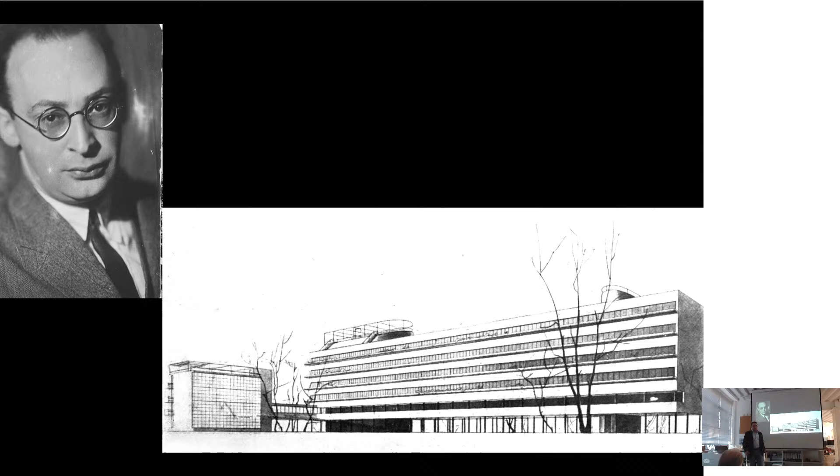Many people, even respecting the aesthetics of avant-garde architecture, still regard Narkomfin as a kind of social utopia of that time, which had nothing in common with real life, just a very interesting example of how people could live. But the house was constructed as a residential block for normal families, and now it is working as a residential block where all the apartments have been sold to different people of different ages, with different family sizes, of different social status. So this is a very good example that the house was done for the modern era, modern people, including us.

But while working on my PhD, I made this timeline of our family, because speaking about Narkomfin, I have to tell about it in a family context. It's really a mess that all the members of the family were architects, and they were writing books or constructing houses. And the situation I was brought up in was very hard, because everything I heard since I was born was just about architecture, with a lot of criticism of some architecture and rarely good words. Being architects or close to architects, you can imagine how it could be.

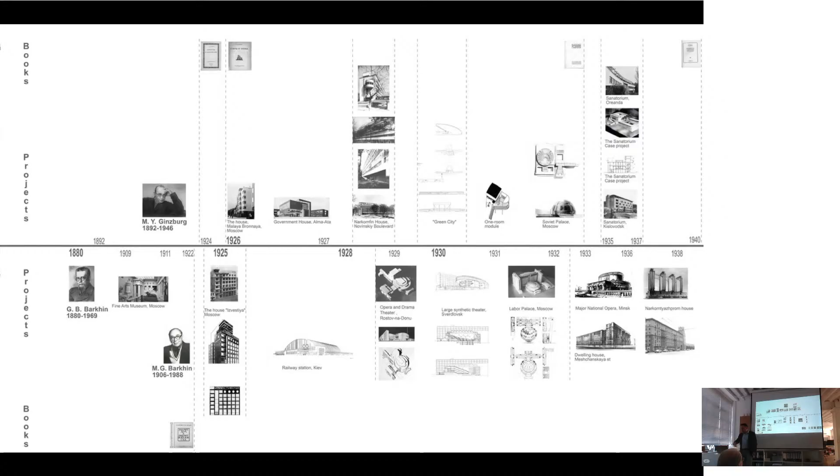So this was important for me, to try to work on this project, because my father started it in the late 80s of the last century.

In 1986 I started to help him in his attempts to bring the house back to its original state, because it was in a very bad shape already, and it has gone to even worse shape through the next 20 years, because all his attempts in the later Soviet period and in the post-Soviet period were in vain. I was trying to help him as a student architect, making some drawings, and later helping to produce concepts of how it could be used.

We were trying every possibility, but it so happened that he tragically passed away in 1997, and it was my debt to him, more than to my grandfather, to fulfill this story, to complete this story, and to finalize the conservation to its final result.

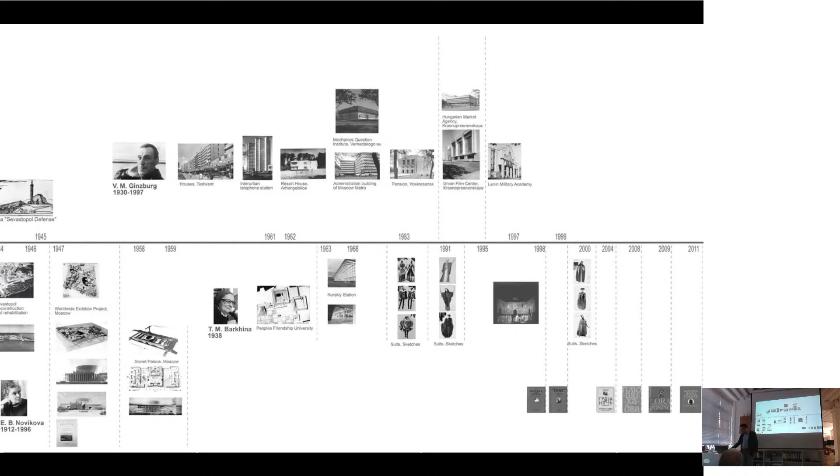But before, I had a very good experience, because my other grandfather, Grigory Barkhin, also was an architect, and he made one of his most well-known buildings, the building of the Izvestia newspaper in Moscow, in Pushkin Square. This is a very nice photo of Rodchenko in his individual manner. So it so happened that the project of conservation of this house was commissioned to us without any idea that the history of the house was somehow connected to our family.

And of course I couldn't say no, and I was trying to formulate the principles of conservation. Being a practicing architect, I had to become a conservation architect, which was not my main occupation at that time. And there was no methodology of work with historical buildings, with listed buildings of avant-garde architecture in Russia. We were trying to learn from experience, how it was done in France, in England. I was asking, for example, John Allan, who was the author of a conservation project, and Winfried Brenne, who was the author of the conservation project in Dessau.

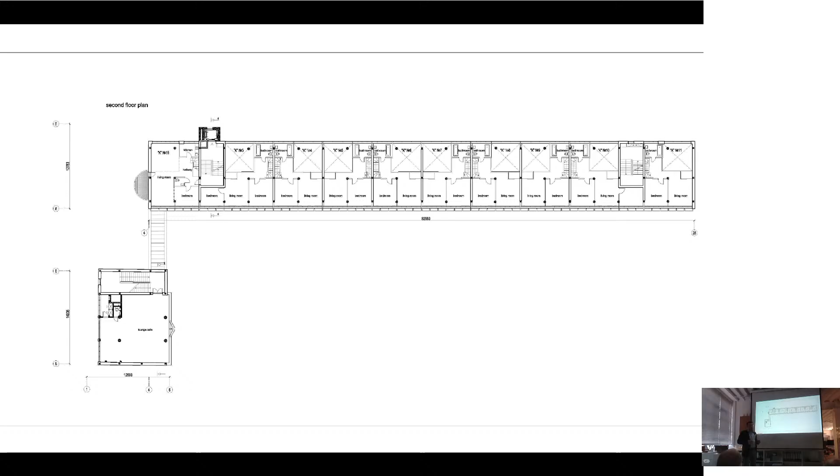So these plans are showing the structure of apartments. There is also a very good explanation why this house was not a house commune, because the commune is something to equalize the people. In this house there are 6 types of apartments for different families, for 2 or 3 members of the family, and some of them already for 4, 6. Apartments from 37 square meters up to 105 square meters. Huge variety, 6 types for different kinds of people living in the house.

The most well-known are these type F units, the smallest ones, but they're not really small, because today a studio of 37 meters is absolutely a good solution for a young man or woman or couple. And this is a studio with the height of the ceiling 230 here and 375 here, because the combination of different heights in these apartments made them seem larger than they were.

And the idea of ventilation, of all sanitary convenience, which is also close to us today, because that was the society existing after the pandemic of Spanish flu, which could be comparable to COVID, and a lot of theories about sanitary rules were invented or formulated after this pandemic. And the architects, especially in this house and some other houses constructed at this time, were trying to use these new rules, same as Ginzburg.

So, I calculated 4 generations of dwellers in this house, and now I'm working on the book, trying to explain not only the architectural but also the social context, and telling about people who were living there, about their histories. And this is a big rhythm of life. The generation of first dwellers, the new Soviet elite, living there from 1930 to 1937. People who came there after the new elite was assassinated in the late 30s, after the war in the late 40s, and living there until some 70s.

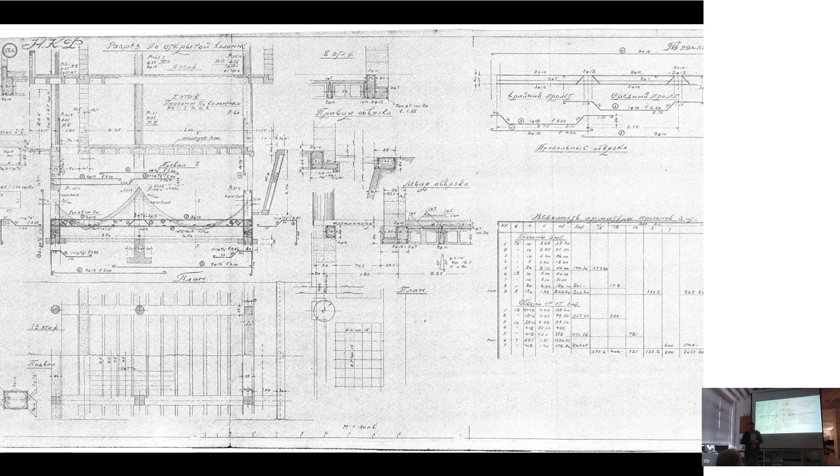The monolith columns and beams inside of the ceilings made a three-dimensional grid, which was the main structure of the house. Same as the stairs, which were done also from monolith concrete in a very good way, because the steps also were prefabricated.

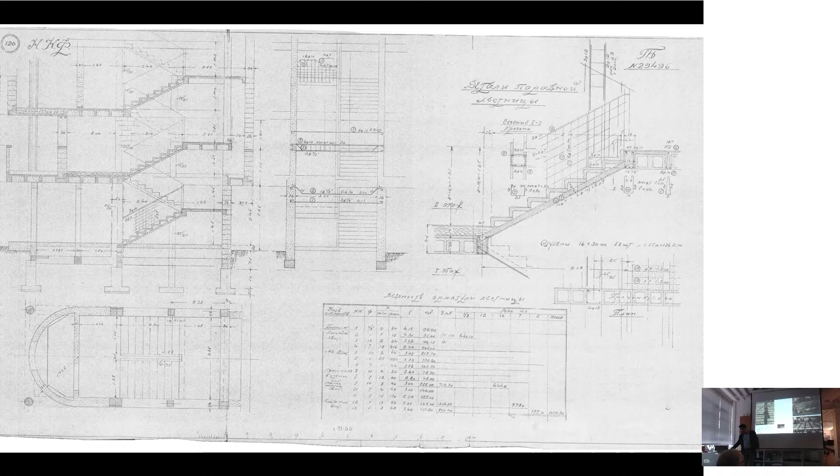in the ceilings. These gaps were filled in with monolith concrete, and the space between the stones with these metal pieces became a concrete beam after the concrete was poured into the ceiling. I will tell you that the cost of such a structure is approximately 20–25% cheaper than a concrete slab.

I was involved once in a project in France of a small mansion, and I understood that the construction workers there, the contractor, used this technology and proposed it themselves just because it was cheaper. So thanks to them, I know this difference. And of course, economy of materials was important because Narkomfin was an absolutely luxury house at that time.

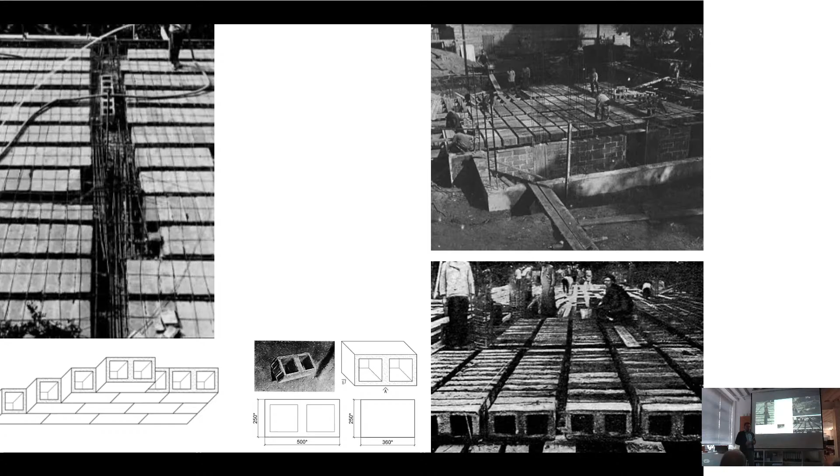I've been in other Ginzburg houses which were done not with the same technology, but using the same apartment types. And they were much cheaper. In Moscow, in Ekaterinburg, they were done much easier, much cheaper. Of course, Narkomfin was really a luxury house of that time, but still the budget was not very high, and they had to look for any economy that they could.

This is another type of stones, which was also prefabricated. Sorry, this one, because this is how they looked in the demolished part. And this is what we found: stones produced by our industry of the same shape, with even the same number of gaps in them, and the same dimensions. It was very important because in some parts of the walls we had to make new cladding, and it was not possible to do with stones of a different size.

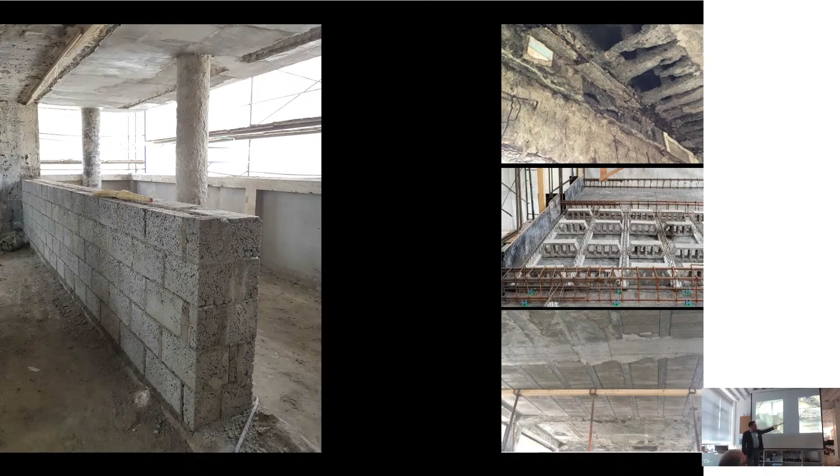That's why this absolutely warm wall of 36 centimeters with insulation here, and block and half block on both sides of the insulation. This is the structure of the walls of Narkomfin. We used these stones to make parts of new cladding, for example, like this. And this is part of the ceiling. This is not Narkomfin, this is the laundry where we experimented.

We also found stones similar to those in the ceilings, because we couldn't do any conservation. The building was absolutely ruined, so we managed to save some parts of the ceiling, but some parts we had to redo. This is a new ceiling, and it looks almost the same as the old parts and how it was constructed originally.

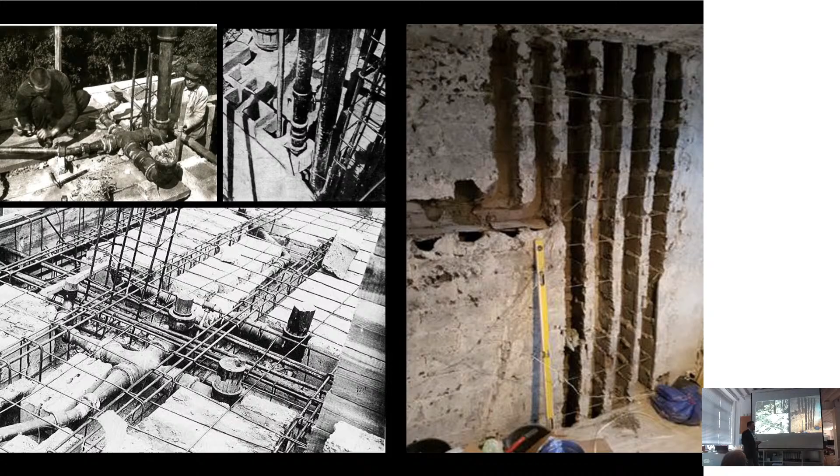A very smart idea of engineering supply, because these pipes also used the gaps in the stones, and all the pipes were hidden inside the walls between the apartments. No pipe except heating, because heating was situated horizontally below the windows. All the sewage and water pipes were hidden in the walls,

and this is the ceiling between the second and third floors of the building, where the size of the apartments changed, because lower we have bigger apartments of 78 meters, and above there are apartments of type F, 37 meters, so two type F above one type K below. They had to make these horizontal parts because the rhythm of these apartments was twice bigger than those above.

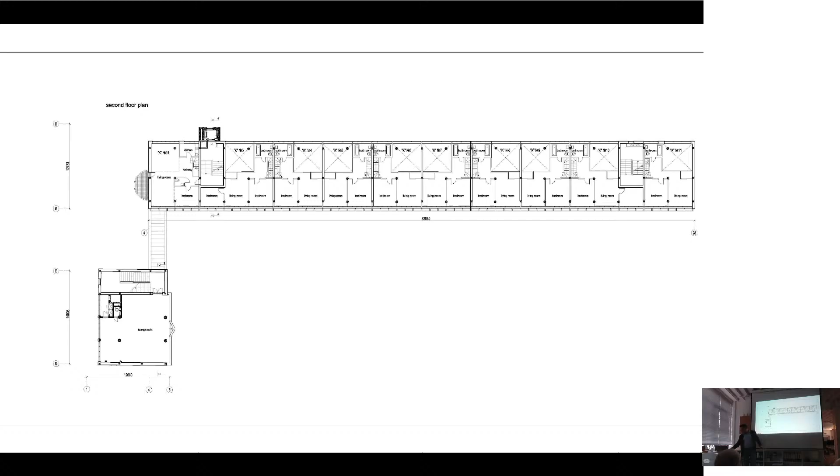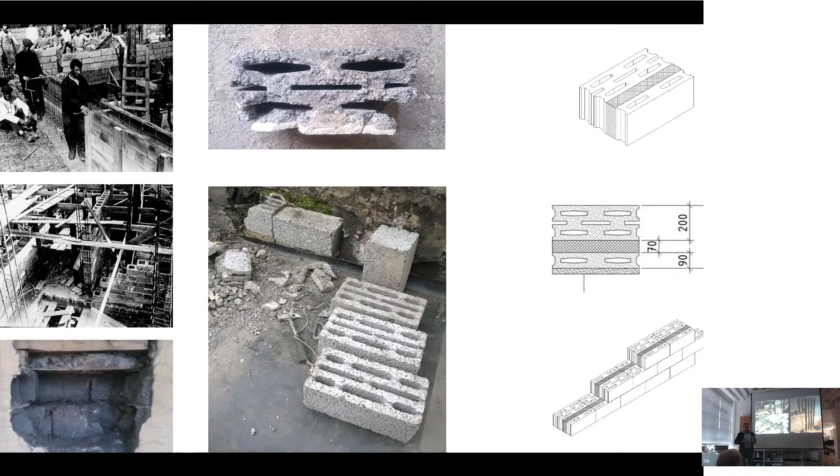That's why they had to make these horizontal parts, and it was a mess to work with them, because no one understood that during the conservation work we were going to leave all the engineering supply in their places. People didn't believe that this is possible, and we were trying to investigate where they were with metal-finding machines, making small gaps in the walls.

Finally, we had to cut the parts of the stones where the pipes were, because otherwise we couldn't put them in any other way. But now all the pipes are in the same parts, even though some of them were damaged. These steel pipes we tried to change very carefully for new ones, leaving the ceiling in the same place

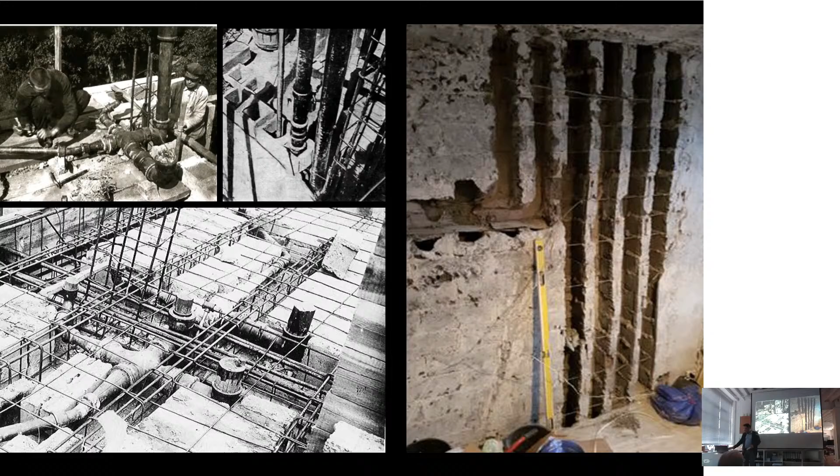without killing the ceiling. Sorry for this joke. So these are just the parts we had to take away, because many things were added to the house, and this is just the diagram of some later pieces that we had to demolish.

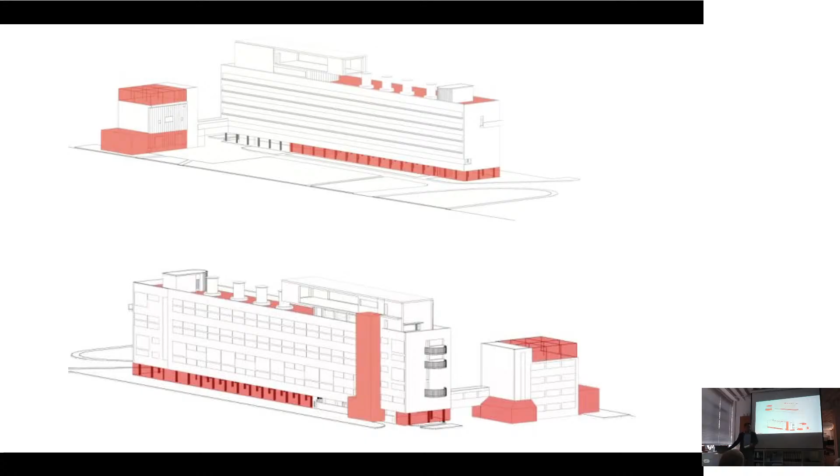This is a very specific story about flower beds, because, as I told already, these flower beds were the problem, because they had gaps for draining here, and in the late 50s people fixed these gaps because they didn't want water from the rain going out of them. And when they fixed them, the water couldn't get out of the flower bed, and then it could get in small holes between the stones, and that of course seriously damaged the concrete structure.

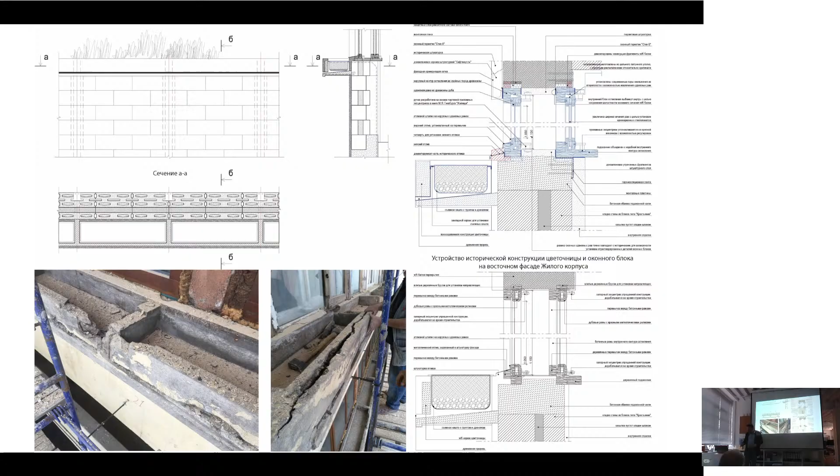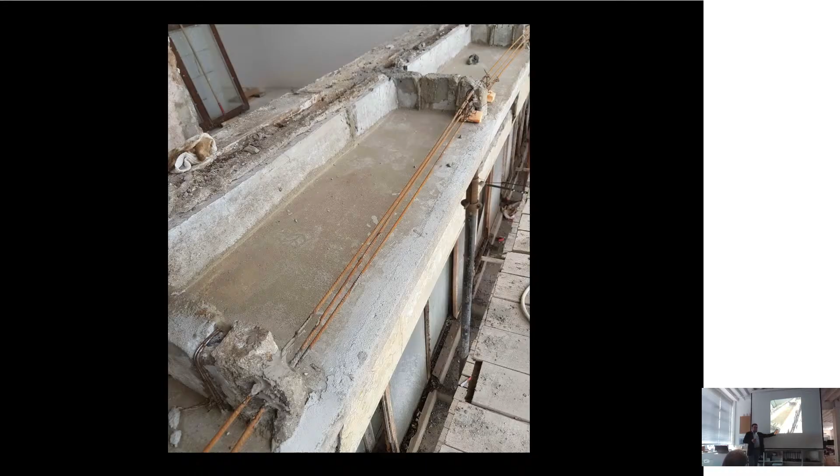It was very complicated to make a contractor not cut all the flower beds and make new ones and fix them on the facade. We had to explain to him and prove that it is not possible, because the metal parts are going from these flower beds to the wall and to the ceiling, and everything was done in the house so that you couldn't touch it, or if you touched this, after some time some other part of the house could move. So we insisted on restoring, not making new flower beds, and this was how it was done.

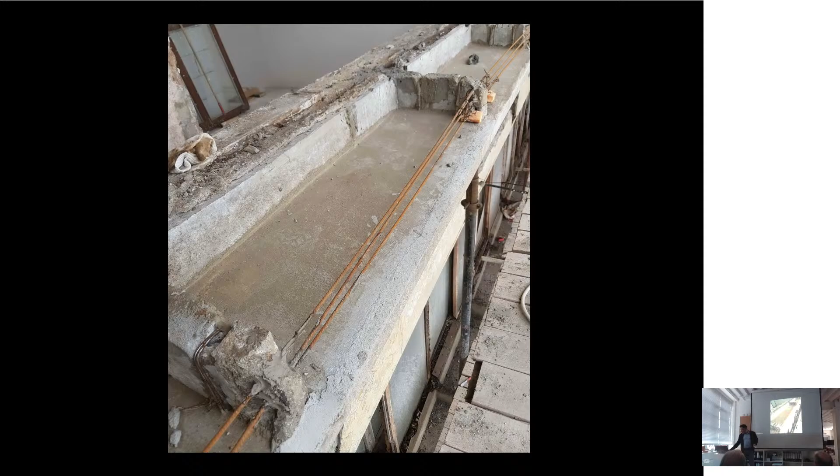These are already restored parts with added concrete, with the original metal frame, which is connecting this structure of the flower bed with this wall and the ceiling there.

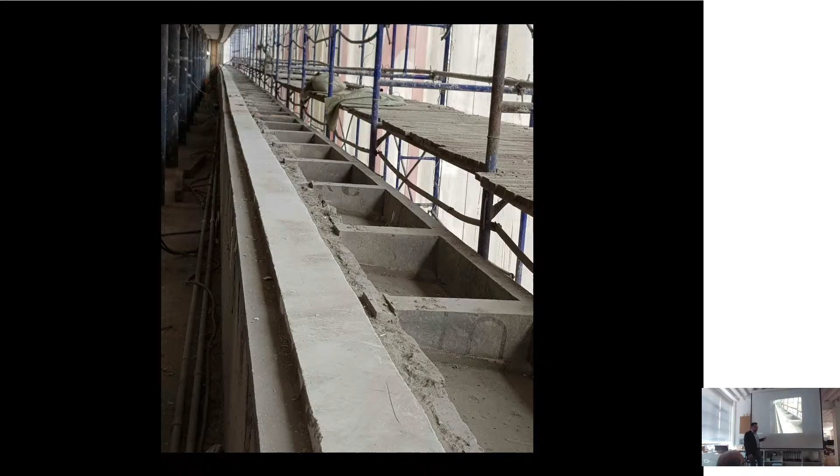This is the structure of the elevator. We couldn't avoid it. Of course, I'd rather take it away, but the developer didn't let me. It was a private project. No state money. No financing from any charity funds. It was a stupid commercial project. A commercial developer which was trying to make a luxury commercial house from this building. And finally they got the prize for the best clubhouse of the year. I guess Moisei Ginzburg could smile somewhere there where he is looking at this, but they got this prize.

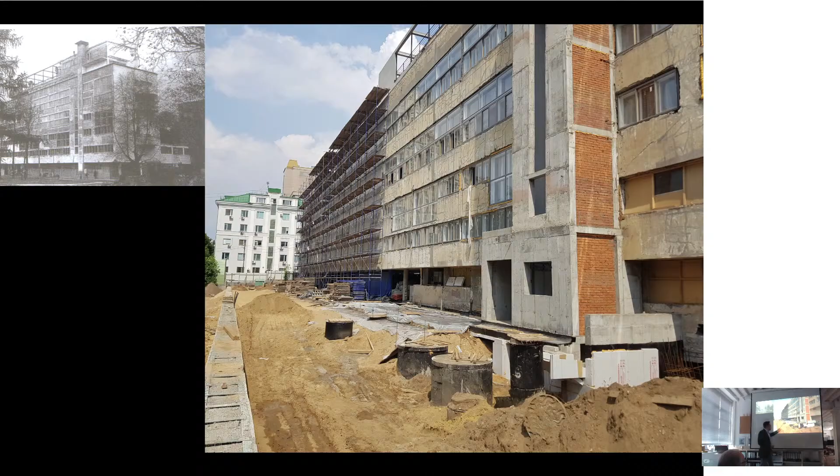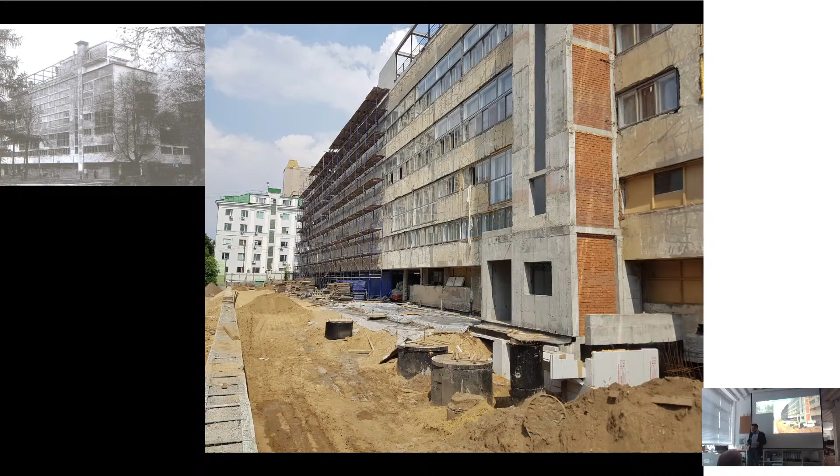So we decided that we are able to leave the lift, the elevator, but we tried to make it as flat as possible. We had to prevent two entries to the cabin from different sides to manage to do this. And we tried to make a projection of the original vitrage of the stairs, which is there, on the elevator vitrage. So we have a cabin with a window and the projection of this original vitrage on this lift, to make it as invisible as we could, not touching the historical original facade.

So this is how it was, not even the worst state of the building, not the worst. These photos are maybe from the late 80s. And how it is looking now.

It is interesting because most of the columns had been hidden in the ground floor, and that helped to save them, because when we found them, we removed the layers of paint with special treatments, and we found the original graphite. They're not black, they're graphite, dark gray, and we made the conservation of this original painting and protected it with a special transparent treatment for conservation projects.

Same thing was with the windows, with the luminaires, with this lighting, which was also built into the ceiling, like they do in modern houses, and all the metal pieces had been hidden inside of later structures, and that's why they survived, and we could use them, and all the metal parts of this lighting are remaining. Of course, we changed the glasses and put in the new electric supply.

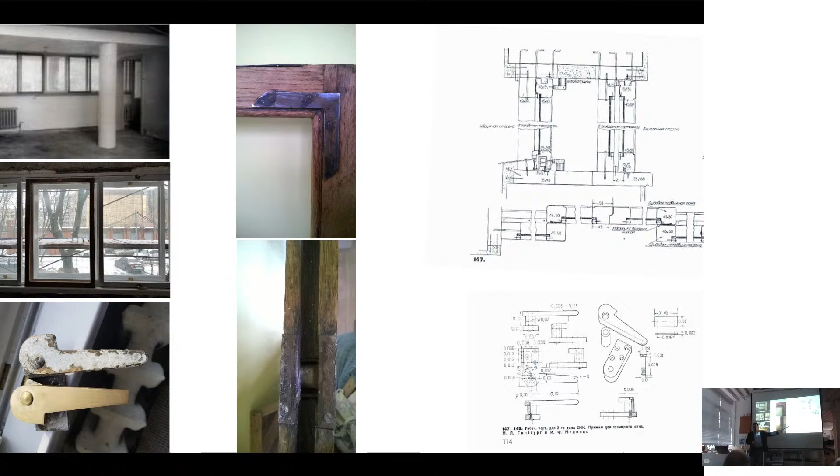So this is the very smart mechanism of fixing the sliding windows. But we understood that when the house was constructed, they simplified something. They didn't have enough, I don't know, money or just a possibility to make this cylinder. And they made a flat metal anchor part instead of it, like here. So we took all the remaining original metal details, and we implemented them into the facade. But the new ones were made according to the project. So they are different, and this is showing what is new, what is real.

Now this one. Here you can see, these are the new ones. Ordered in China. It was an expedition of our structural engineer to China. He ordered the frame for the glazing of a communal building, and these pieces. And that was incredibly funny how they produced it. But these are the new ones.

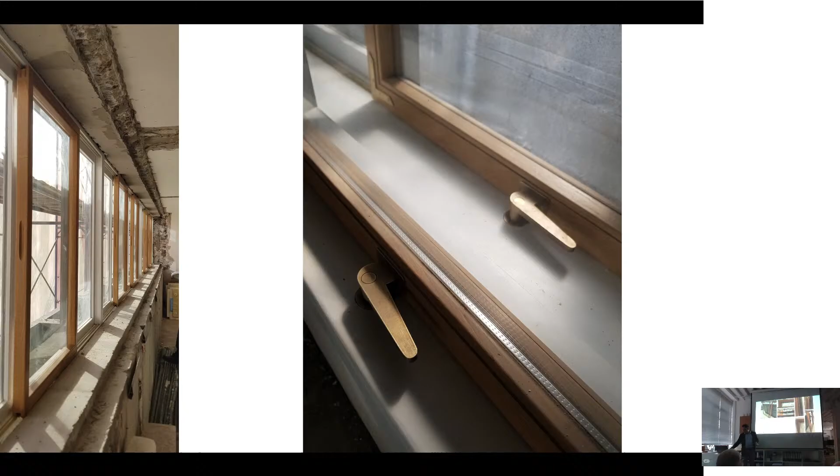This I already explained about the old frames. That was a battle, how to keep the most possible amount of original frames in the house. It was like on the market. I said, we have 80 frames. The contractor told that he's able to restore just some of them. Finally, we used 50 of them, because the developer told that he was ready to throw them all away because this is too difficult and too risky. In the windows of corridors, we put the old frames because people who are coming in the house can see them. In the windows in the apartments, where just dwellers are inside, we made new windows.

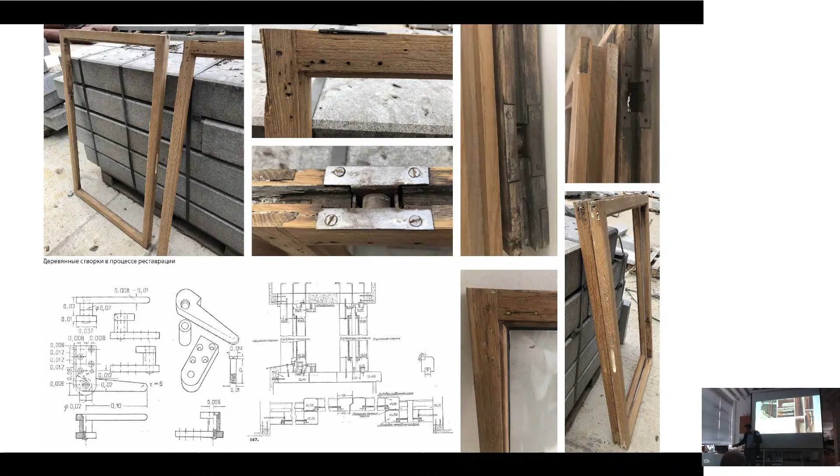And the funny thing is that on the ground and the first floor, they were doing concrete frames for the windows, like Corbu later on. I've seen this thing in Monastery La Tourette that he's done already in the 50s. So they've done these concrete frames, as thin as 40 millimeters, with one or sometimes two metal pieces inside to reinforce them. No one would believe that we can restore them, and we restored some of them.

But this photo is showing the process of production, like we're producing the stones of different types. No, one type we found on the market, and another type we were producing on the site, like the contractor of the house in 1928. And these concrete frames, we were producing them on the site also.

The horizontal windows of the basement, they've been inside in the ground. That's why they've been seriously damaged, and all the metal was corroded. It was not possible to do anything with it. It was also part of that sanitary theory of that time to let sunlight, daylight to the basement. That's why they did around the ground floor. We had all these horizontal windows. Their shape was very bad.

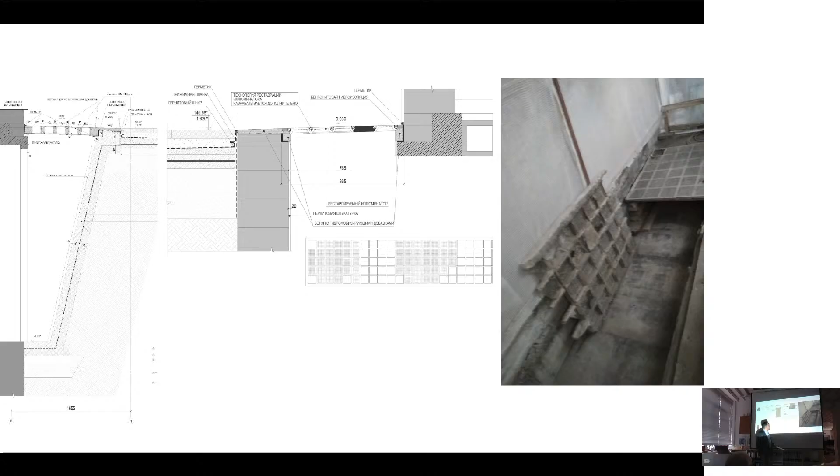We made new ones. This is the process how we were doing them from glass bricks. Very good glass bricks from Czechia, Czech Republic, and this is how they are looking like now.

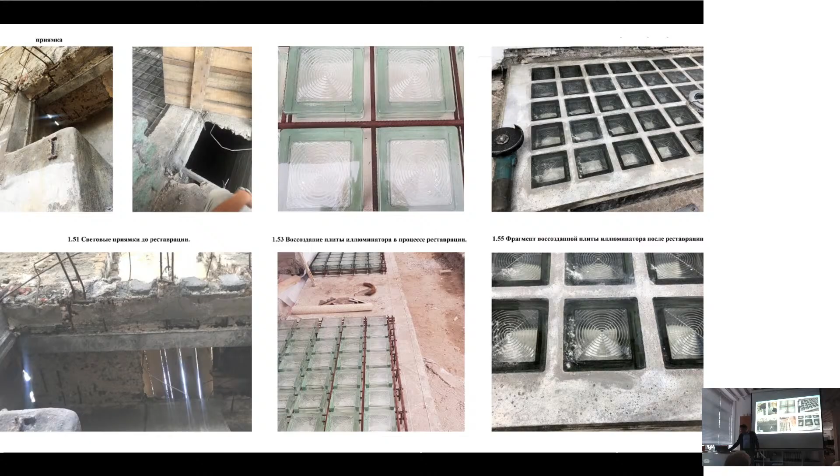The process of the work, and one window which is inside of the house, because the elevator was added later on, and we had one window between the elevator and the house. We made it like a museification. This is a special glass. You can stand on it, and the window itself is below this glass. And this is how they look like from inside.

And the most complicated was to find the same stones, because they've been faced with stones, and we needed to find the stones of the same color, and every market that we were looking at, the color was white. The developer was angry because I stopped the process again, because I told him that I'm insisting to find the proper stones of the same color. And the same color was not white, they were different tones of yellow, brown, and so on. Quite natural. It was very difficult. We found it, and now we have this roof in a better situation.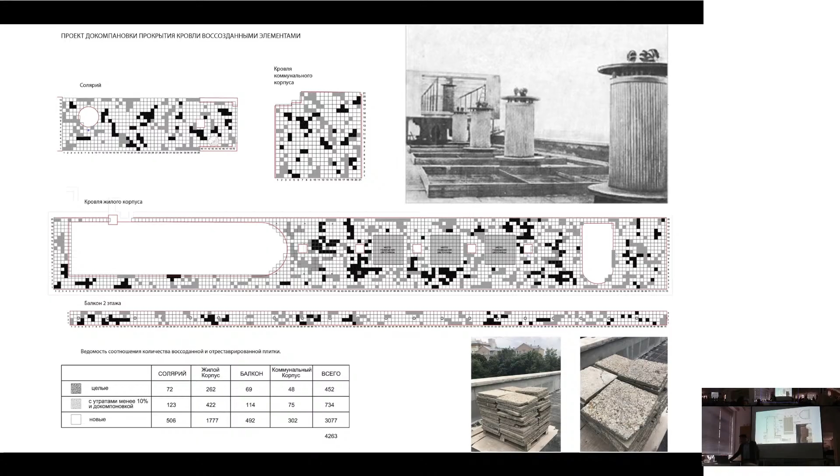This is also a very nice detail. These are the pipes of ventilation. They are looking like chimney pipes over the building, and we managed to conserve all the concrete parts here, but we had to change the wooden parts because, unfortunately, they were not workable anymore. But all the concrete parts are remaining original ones. This is how these wooden parts are looking from below.

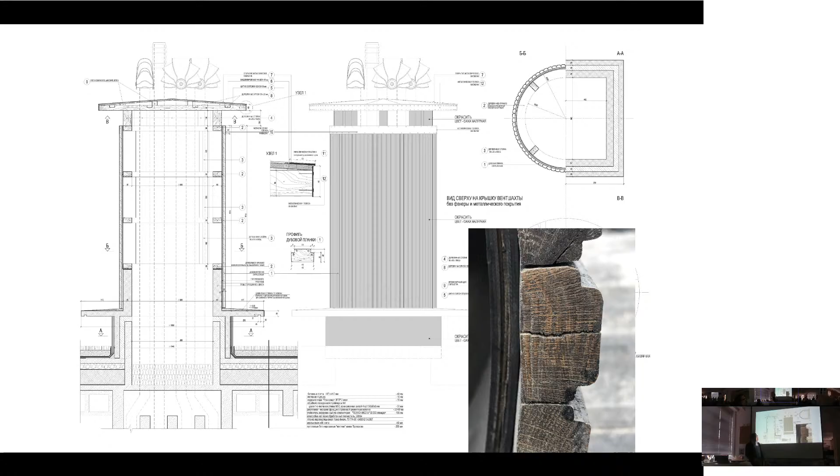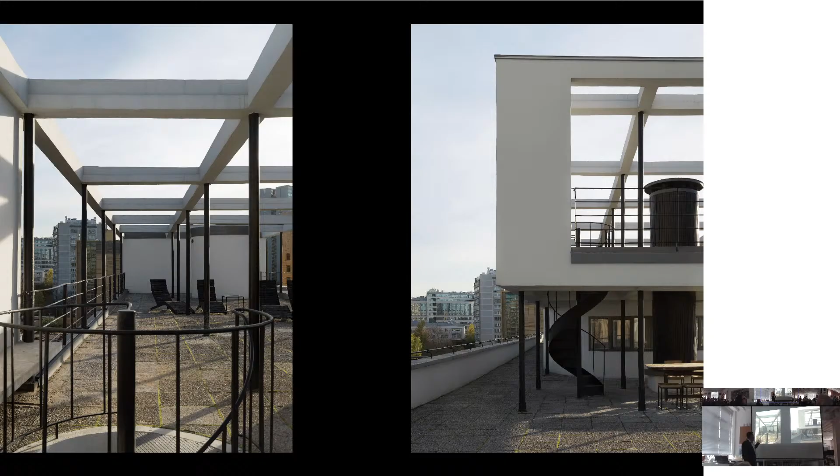So, at the moment, we managed to retain and conserve all metal details, all concrete details, and a lot of these tiles. It was interesting with this railing because it was lost. This is a new part. We found a working drawing of the supporting structure of this railing, and we found the holes in the concrete here where it was fixed. That's why it's like archaeological. Most of the research was absolutely archaeological.

And we understood that we should make this replica, though we didn't find any photo of it. And that was tricky, and I was in doubt. Maybe it was not existing, because there can be a lot of working drawings where nothing has been done according to them. But we found these holes inside of the concrete, and we understood it had been existing, and we made it. Interiors.

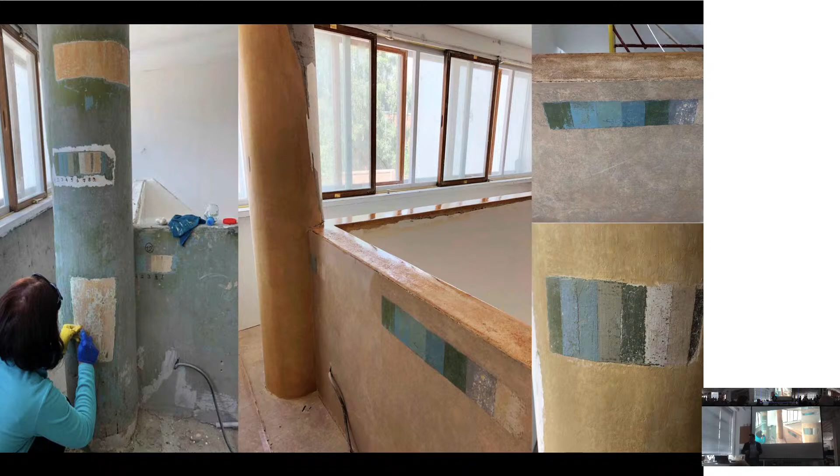These are our studies in one of the apartments. In most of the apartments, everything was taken off, and we had to do them brand new. But maybe one or two of them we found. These are the layers of colors that we found to get to the original one. 6 to 8 times they changed the color in the house. We had these 6 or 8 layers in different parts.

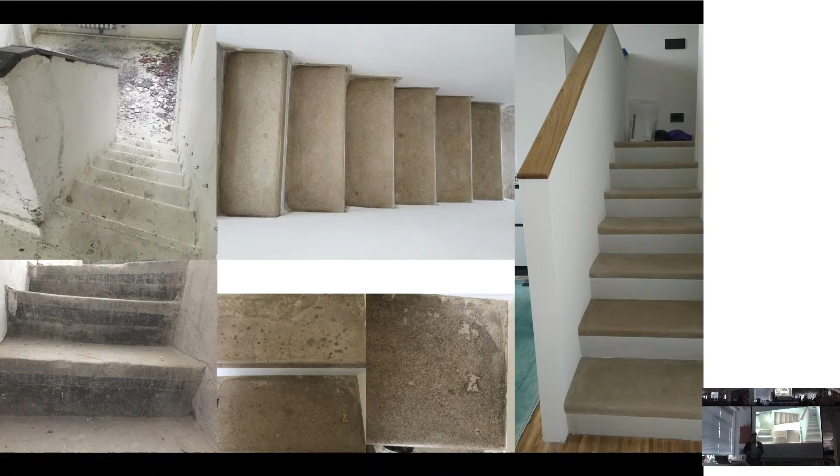The materials. I told in the beginning about the innovative materials that they used there. A good friend of mine, Anke Zalivako, a German researcher from Berlin University, made brilliant research about them, and this will also be part of our book about Narkomfin. This is one of these materials, xylolite.

This is what they do now from cement and sand, but this structure was made of wooden chips and magnesium instead of cement. So it's not as harmful for people. It's warm. It's quite good.

And we insisted that in all the apartments these steps remain. We proved to the developer that we are able to restore them. We found special guys who were working with their hands to restore them, to conserve them. And it's very interesting, they are a little bit different in color, I think, because of the different chips they got. The color of the stairs is different from one apartment to another.

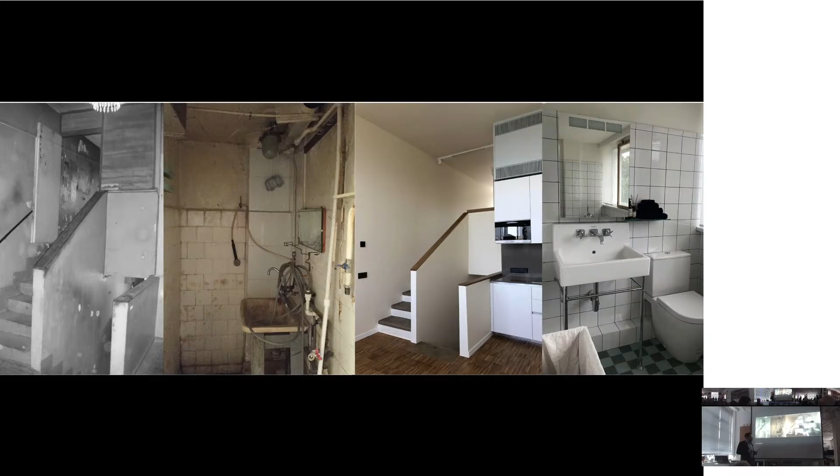As I told, not too many things we could use in the apartments. These are old photos of the bathroom, of the stairs in unit of type K. And this, for comparison, is the same point of view. We put the kitchenette, contemporary kitchenette, on the place where the kitchen was planned in this apartment, in the same place. And we used more or less the same, but as minimalistic as we could find, sanitary equipment and the tiles of the same type and same size for the bathrooms.

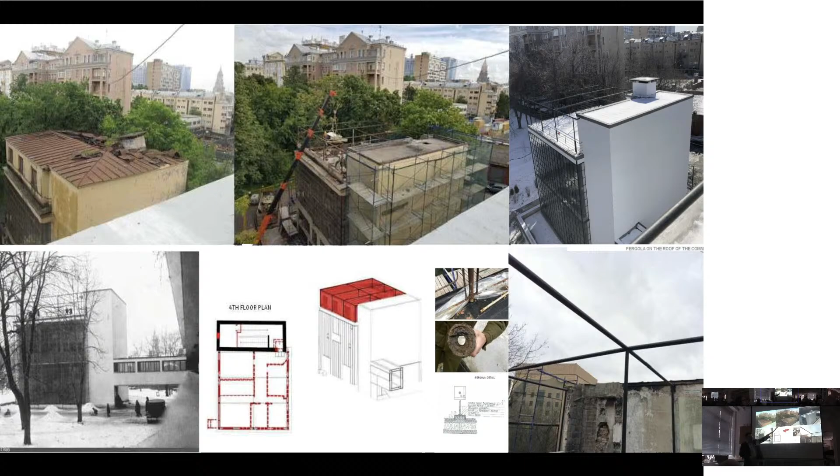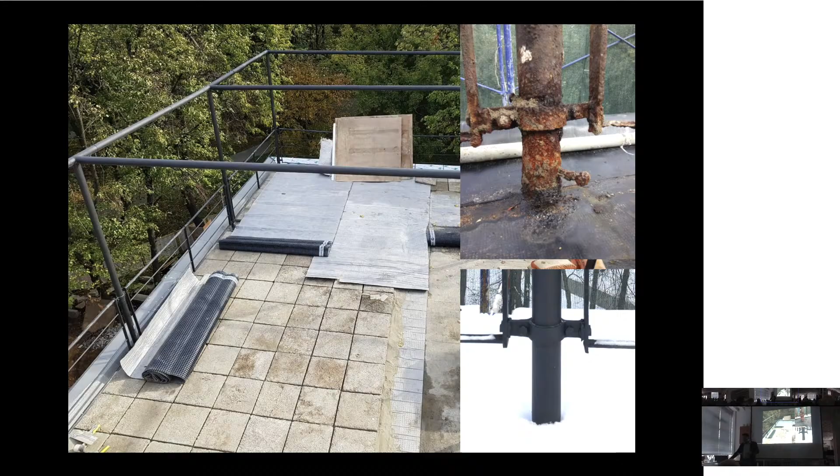This is the communal building. Its shape: part of the glazing was broken and changed to the brick wall, same as the Germans did in the 30s with the Bauhaus when they threw away all the steel glazing. This is kind of a comic of how we worked with this roof part of the communal building. This is the original photo, what we had, how we were taking this off, and found the original pergola, which survived there because the metal was not corroded. This is this pergola. We had to change just these pieces for new ones, but the rest of the metal pipes remained the original ones.

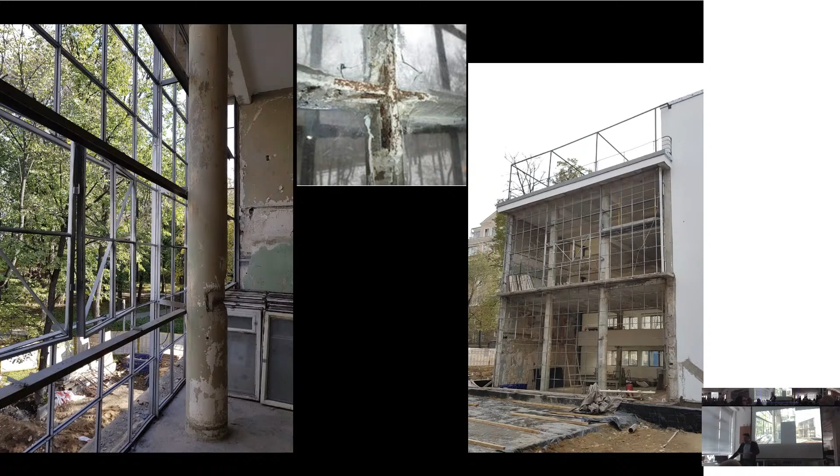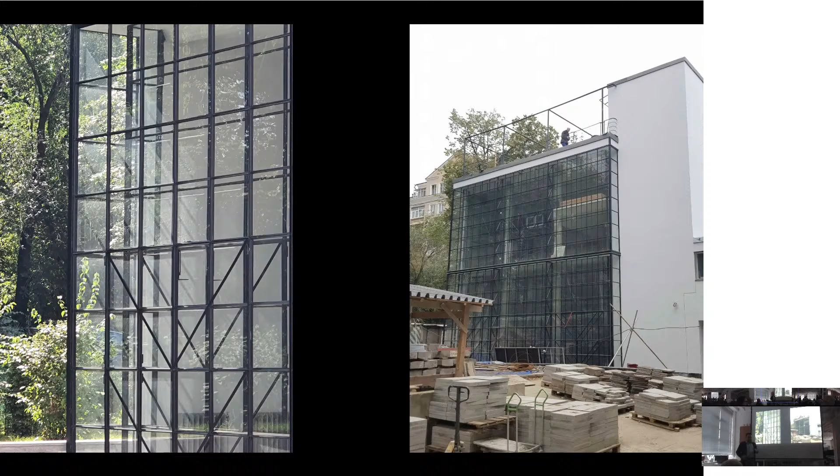The work with the glazing: we used original glazing, though it was corroded. We used it for the internal line, and the external line we commissioned in China, as I told, using the same type of steel profile. So we have original metal inside on both levels, and a new one outside.

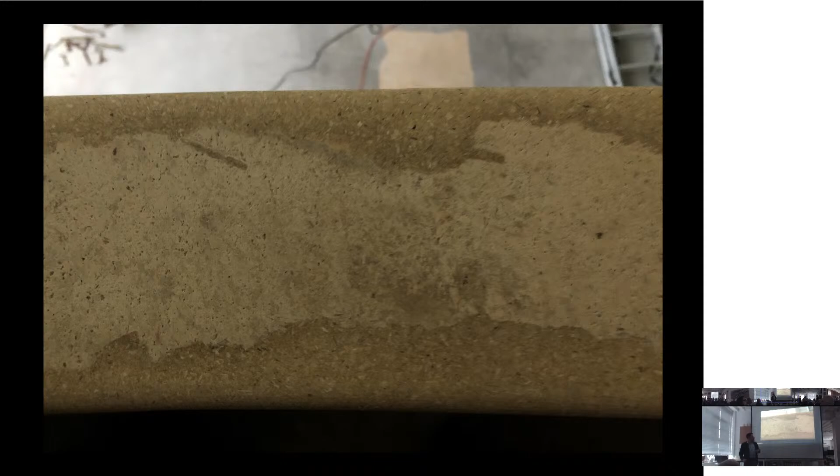Another example of xylolite and our conservation: this is original xylolite. Oh no, sorry. The light ones are the parts that we added, and the darker ones on the corners were remaining. We wanted to have this border between replica and the original one. Same on the floor and the interiors of the communal building.

It was a conflict with the developer. I was ringing to different departments to ask for commissions, for someone to go there for inspections, and they were not letting us in. But then finally we shook our hands. It was a long story for years. It's not a good way to finish it in such a situation.

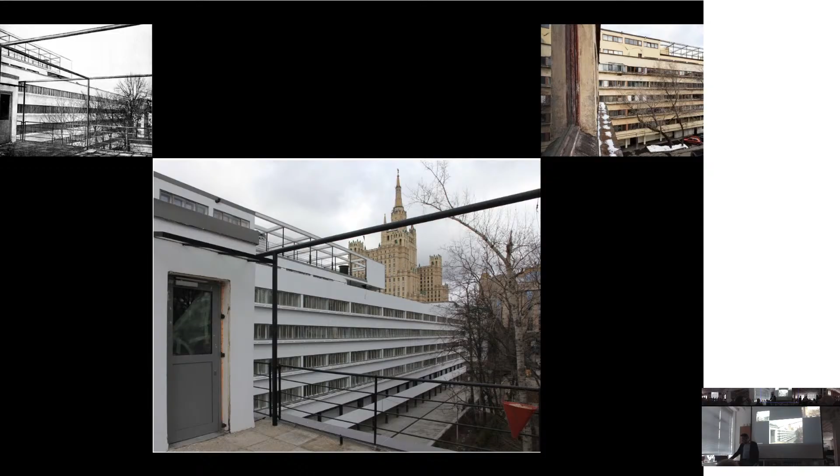So this is how it is looking like now. How it was, how it had become a ruin, and the situation after conservation. Just a few words, I'm sorry, I don't want to make it long, a few words to show this family context.

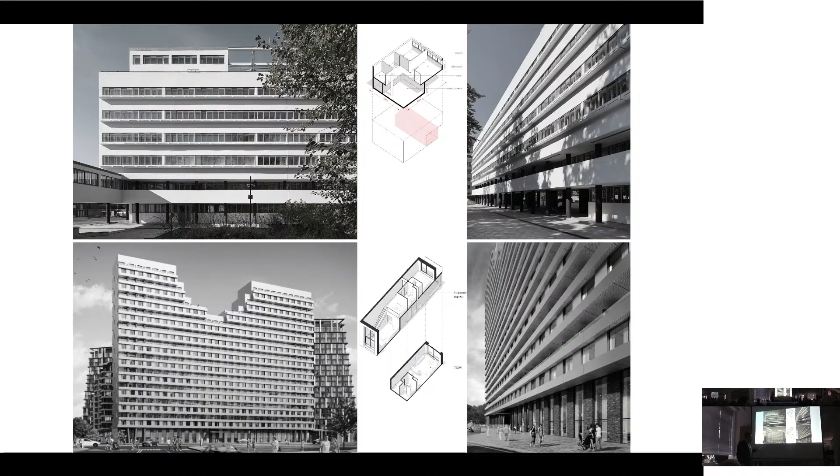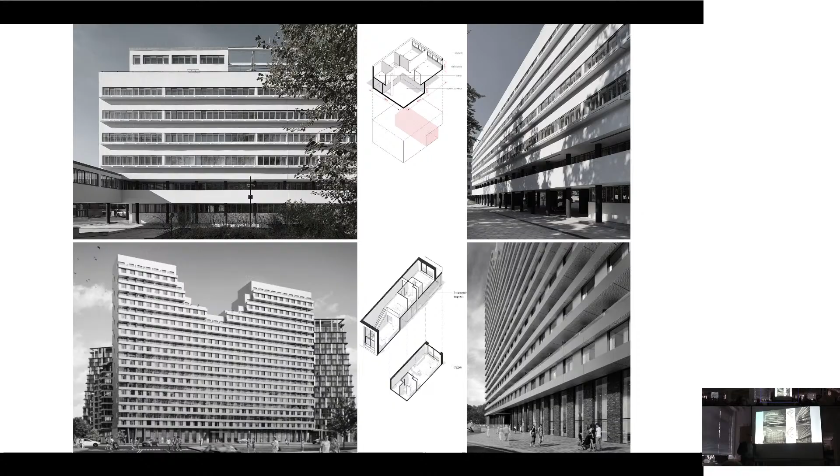Then we had an experiment with one company which we finished with nothing, unfortunately. Just a few years ago, we were trying to make small apartments. These are Narkomfin apartments, and this is what we were trying to produce. And then a stupid law was announced that an apartment in Russia now cannot be less than 28 square meters, and we had 25. So the project stopped on this. And another, not residential, but public building, which is under construction now.

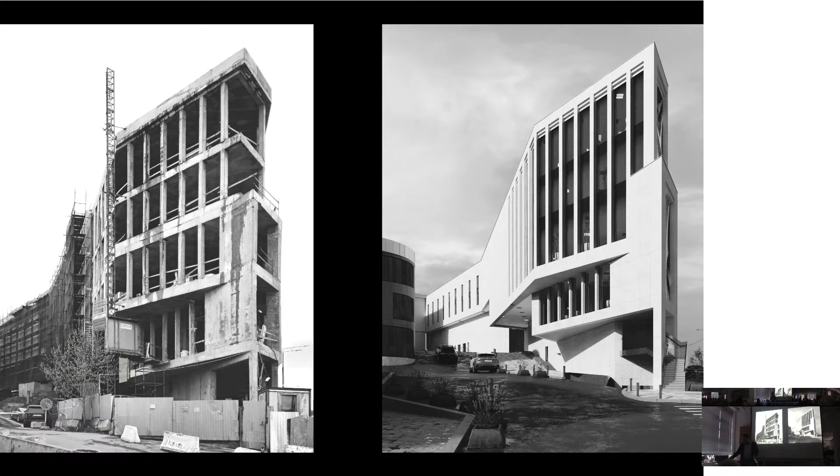So, I'm sorry to take so much time. I just like to advertise the huge work of Natasha, who published all Moisei Ginzburg books in Russian and in English. If someone is interested, we took a few of them here. You can look and even buy them. All the books of Ginzburg, we made kind of reprint editions. We translated them into English, but we retained the same layouts, the same design, to have this ambience of the time when they were published. Thank you very much for your patience.

Hopefully you can answer some questions. But absolutely amazing to see. What's overwhelmingly apparent is your attention to detail, and a word I've learned recently, mereology, the part-whole, the way in which the restoration of a building seems to depend so much on that precision. We talk about technology and that was self-evident, but also everything looked a bit like a painting. Not just the paint, the way the floors were made, the windows, the materiality, it's just incredibly rich. It was wonderful. Questions? Joe?